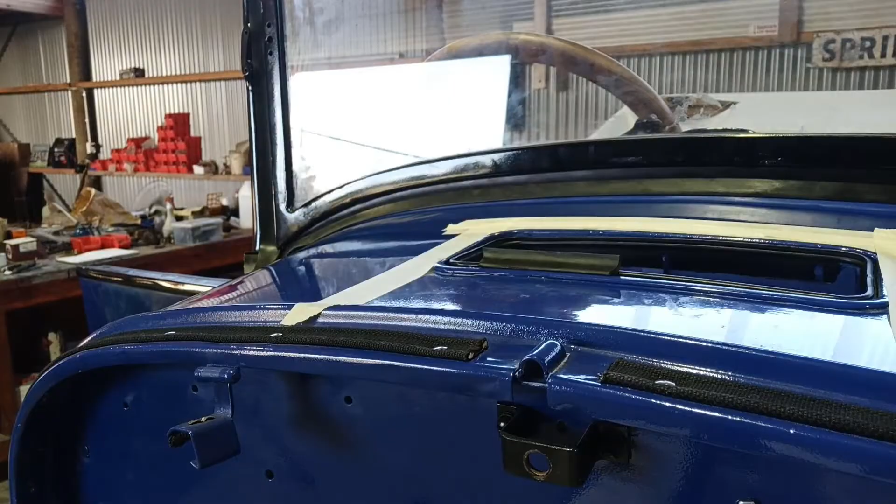Definitely work. We'll just have to trim that edge off. It pokes into the centre.

Tension on there, I think that'll be sitting there quite nicely. Yes, I think that'll work. Might even be able to leave that there, I don't know. Might just have to trim it in the corners maybe. But, yeah.

Right, that's good. That rubber will work, excellent. Right, we'll have another wee measure here, just do another wee work out and see exactly what we need on that other side.

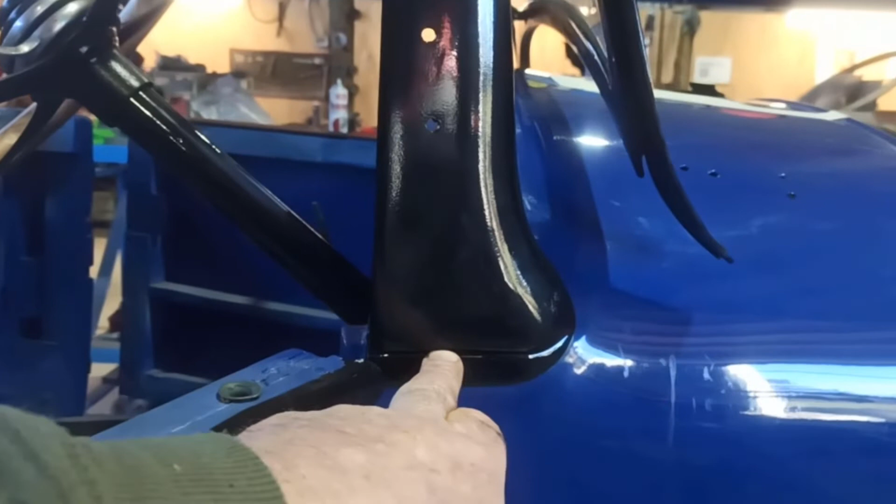Righty, I just had a quick measure from the bottom of the nut here down to this edge, and it's freaking, it's about 5 mil higher on the other side. So that's what's screwing us up there. So I was right, because they hadn't drilled this in here properly. If you hold a tape or a ruler from here to here, yeah, it's about 5 mils difference.

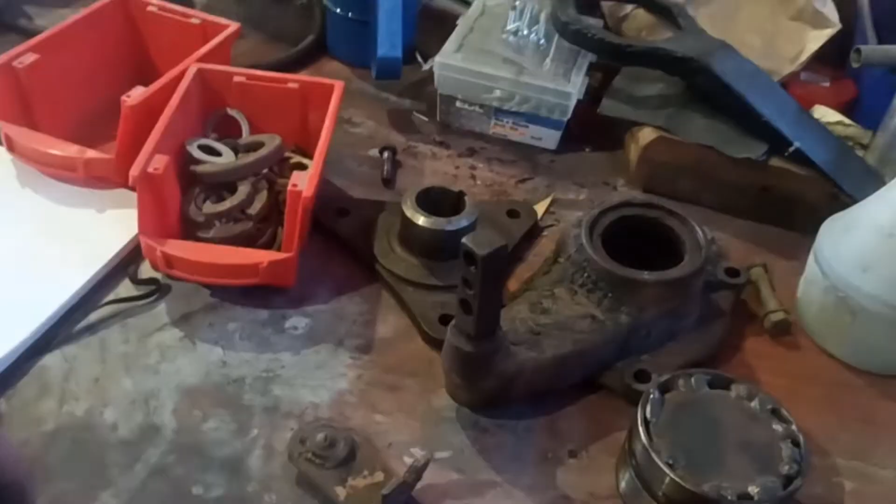I think it was 465 on one side and 470 on the other, millimeters. So yeah, that was the difference between here and here. So if we're talking inches, we're not quite a quarter of an inch, but close.

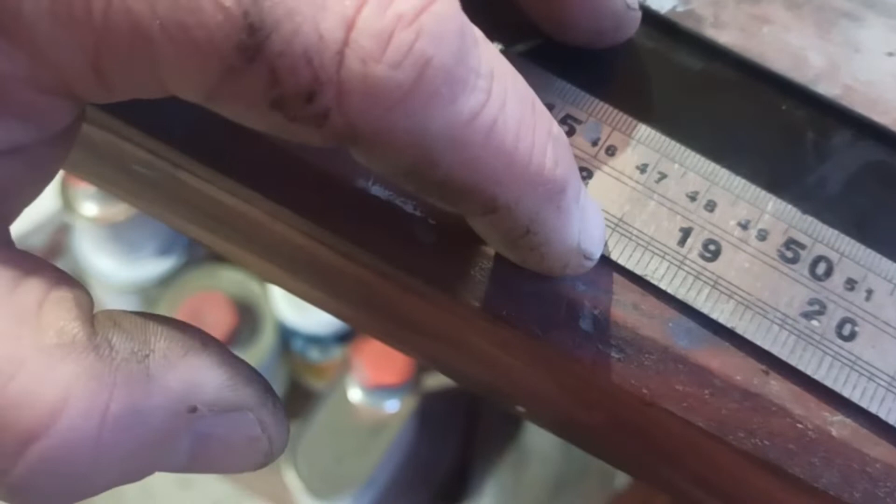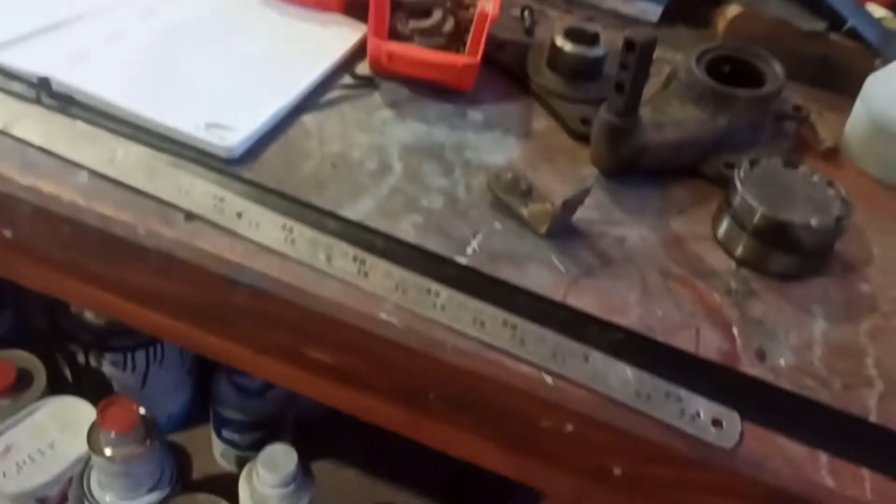What about 3/8 of an inch-ish? Maybe 3/8. Oh no, not 3/8. 47, oh I don't know. It's not quite a quarter of an inch, but it's whatever, you know what I mean. It's about.

Yeah, so we'll order some slightly deeper rubber. I just put a bit of tape on the bottom of it, and it sort of put an indent in it. So that's how much deeper it needs to be on the side. And just tape it back. So, I've measured this.

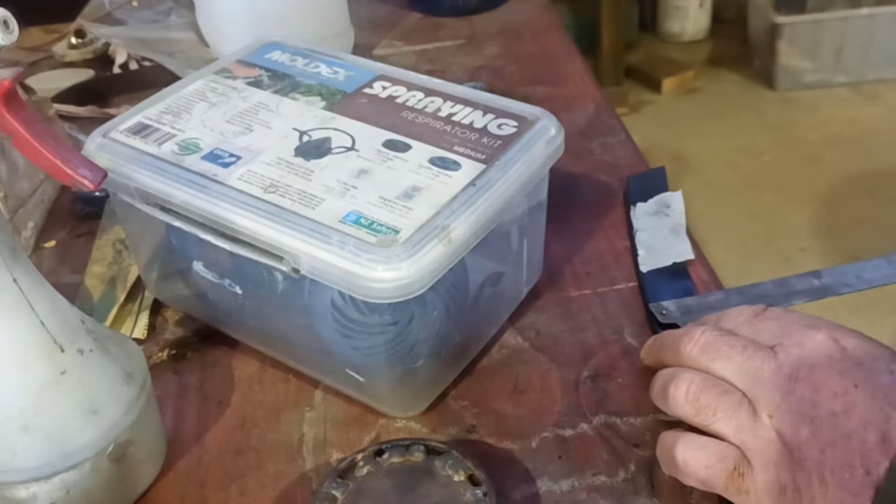Try and show you. So yeah, I actually thought when they measured this that it's, because this was meant to be 32 mil, but I actually thought it was from the bottom of the T to here, but it's the total thing. It's the total height, and it's barely 32 mils, which is, I don't know, an inch and a quarter or thereabouts. So yeah, it really needs to be.

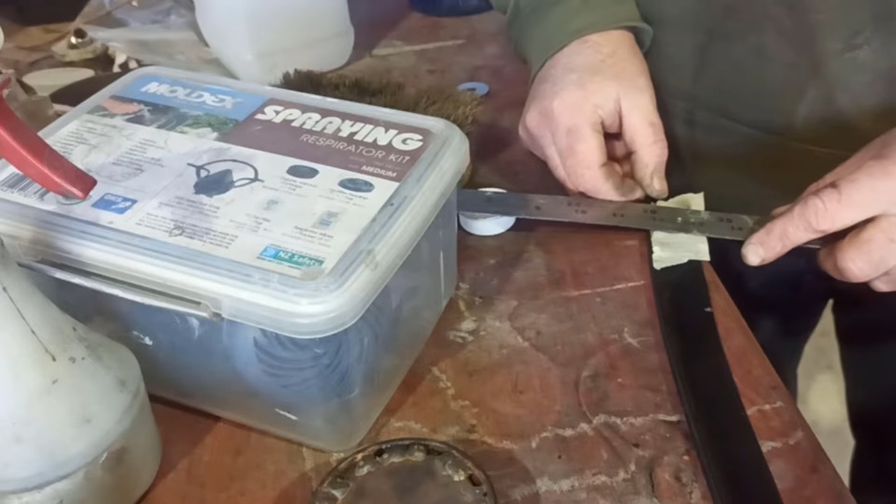Get a bit of the working part of the ruler, which is not so hard to read. Where are we going, to the 3M? So it needs to be about 38 millimeters, or yeah, 1.5 inches. So it's quite a difference.

And we'll just have to slowly trim it back, and we'll just leave it slightly longer on the side so it's not quite so obvious. But you know, we'll probably trim half that off to the other side or something like that, and just leave it a little bit long. And hopefully nobody will notice.

But yeah, that was what the issue is. Yeah, because they drilled those holes in a different place. Doesn't help, does it? But anyway, not much you can do about it. At the end of the day, I could actually probably sneak another piece of rubber underneath there and just pop it up a little bit, but I'd rather just leave it alone and get a longer rubber.

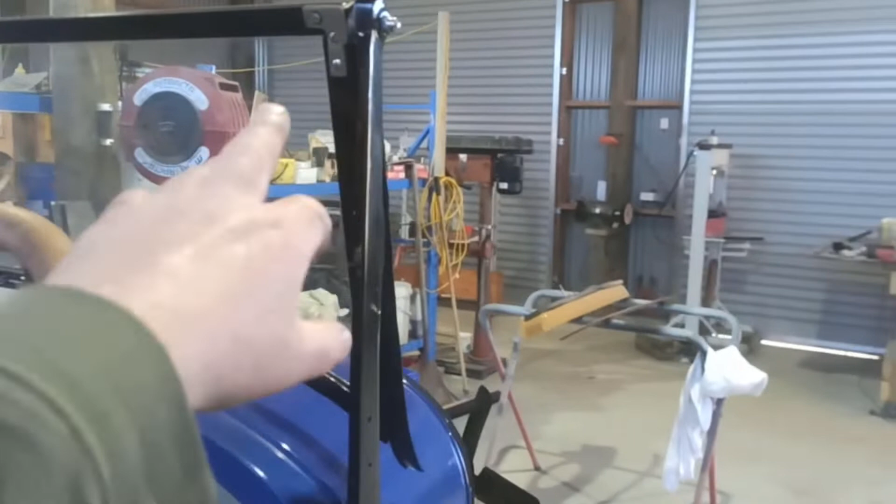Because I thought maybe you could balance it out a little bit, but there's not much I can do about it. If you had a few of them to pick from, you could probably muck around and pick two that were close and maybe alter it or something like that. But yeah, it's one of those things. And it's not to say that these here, you know, milled exactly the same either - there could be quite a bit of discrepancy with these pieces too, which wouldn't help the situation. So yeah, she's quite a bit higher on the other side.

Right, one gauge installed. So now we will go fit that back in the dash, with 3 nuts, because that's all I can find that are right through it at the moment. It's all good, we can soon get another one, pop it in there, put the hand up in there and put it on and tighten it up at some point, when I find another one that's the right thread.

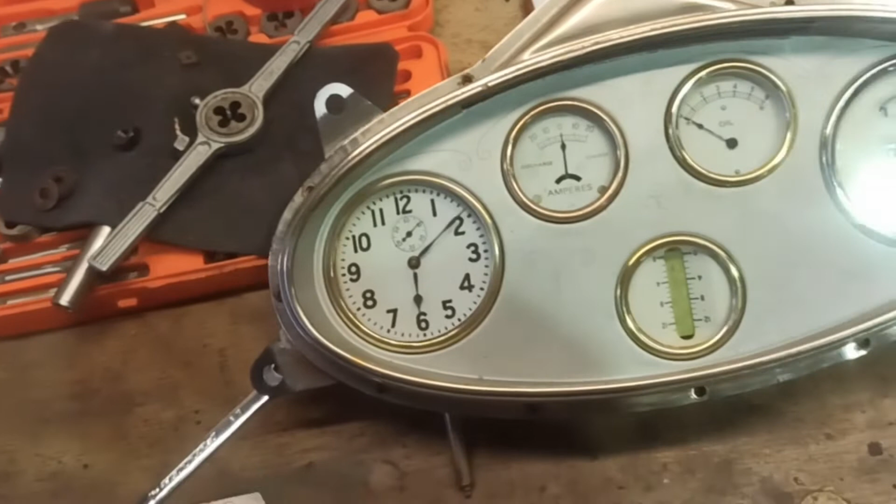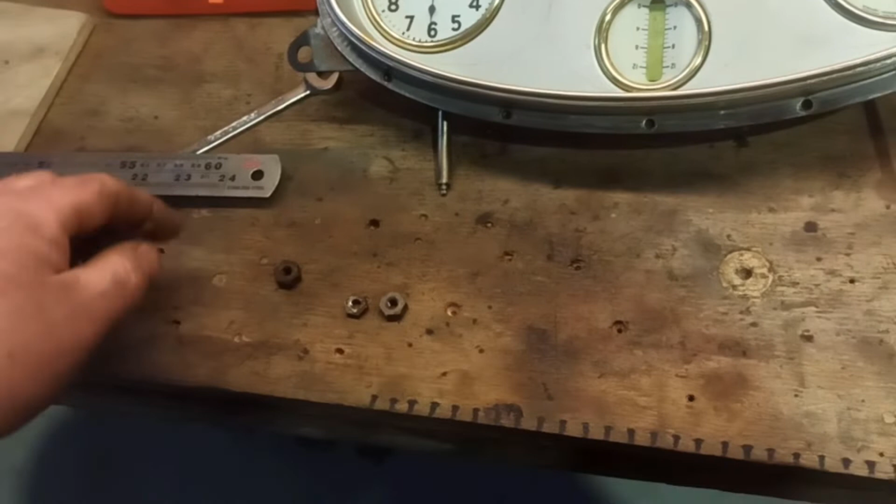There's these same thread as this. I'm just going to run them all up and down here a couple of times to make sure they are fine before I wind them into that dash panel. So yeah, it's good to have that done.

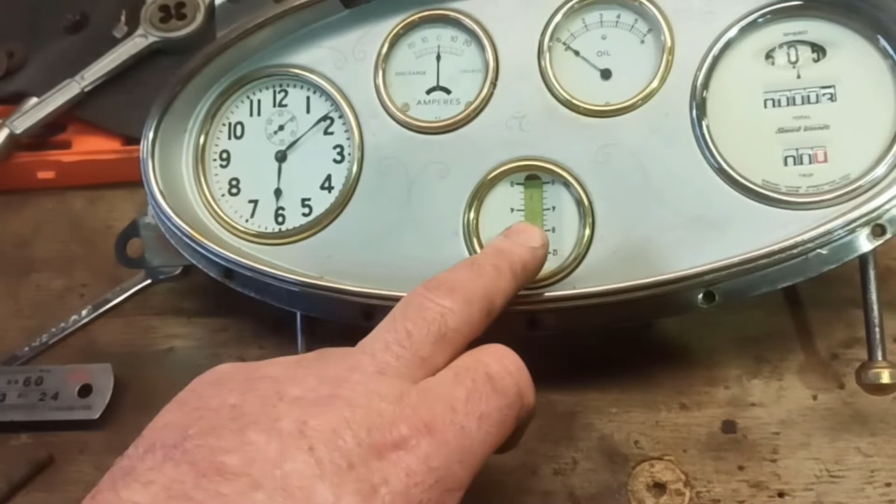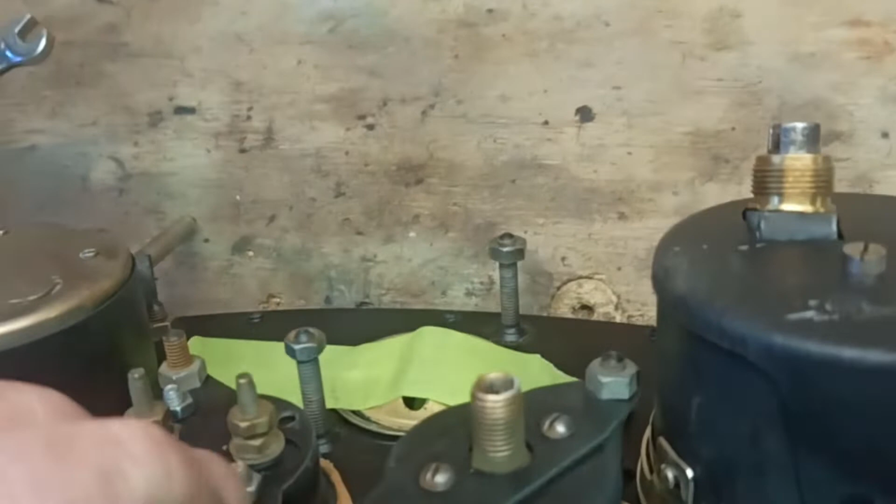Yeah, like I said, this is the only one that hasn't been sorted, but we need to, when we can, get those bits ordered. It's one of those things, it's only temporarily held in there at the moment with a bit of tape with that piece. So yeah, when we get the bits, we can soon pop it out of there and put it together and put it in.

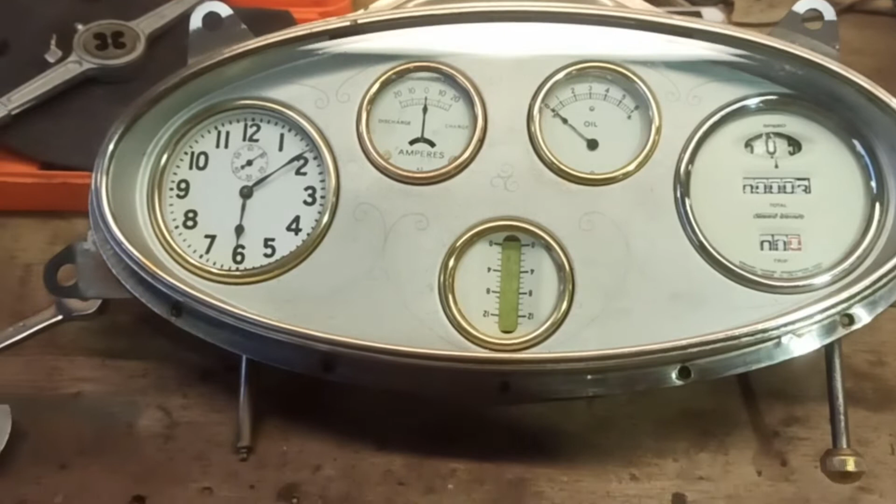Yeah, when we get to that far, it's not critical to start the vehicle. Nor is that either, but you know, at least we're, I don't know, 4/5 of the way there with these clock works. The only other thing we're going to do is organise a little brass button handle or something to go on the bottom of that at some point.

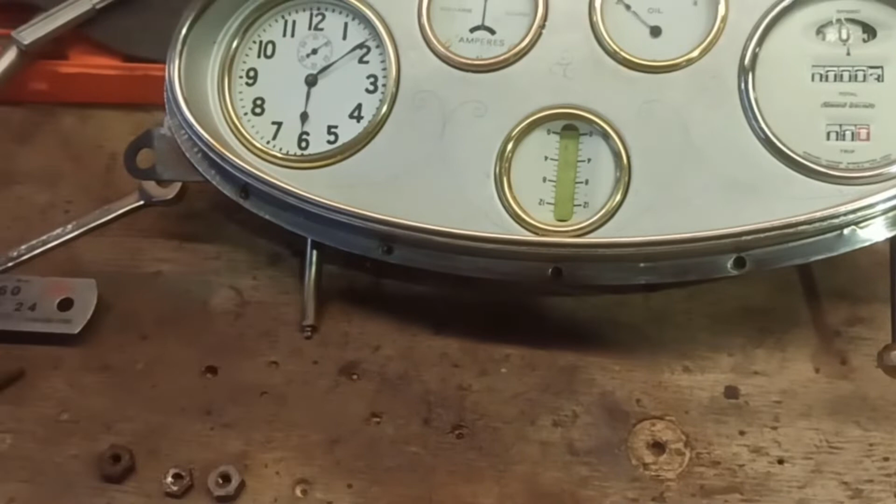Righty, so dash is back in. I'm going to have to try and get some better screws from here.

Just these old original ones, now that I've screwed this in a couple of times, it must have pulled the thread on the brass. It just won't grip very well now on a couple of these. So I really need to change them, which is a pain in the ass because of that funny, weird, fine American thread. Sorry guys, it's a real pain.

We're still waiting for ones for across the top, so hopefully they might be long enough to do in here, because of the same thread. But yeah, a freaking headache to get. I don't know why some of that stuff's just so strange, but it's not easy to get.

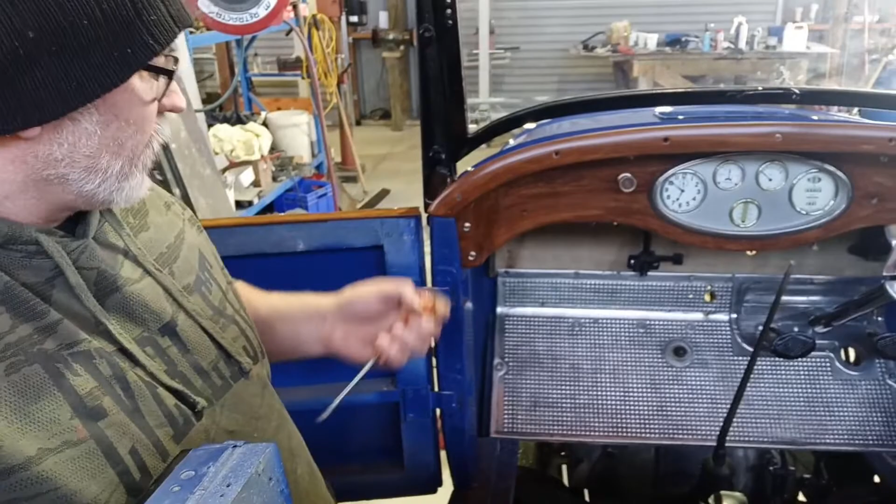So I'm just going to tighten up one screw on there. I've only got the 3 screws in here at the moment, but everything else is all done up. These won't tighten up though - they sort of wind all the way in, and then you go to tighten that last little bit. Must be the thread where you've pulled on them a few times, and it's a pain in the ass. Not much I can do about it though. It's just one of those things - when you're trying to use 100-year-old hardware, it just doesn't like being screwed in and out too many times.

But the dash looks good, on a bonus note. So the only other thing I do is tighten up the 2 bolts on the bottom of the column for the bracket. As you can see, there's a gap here at the moment - I've just wound them in there, I haven't tightened them up yet. But it's in there, so it's good to have that in.

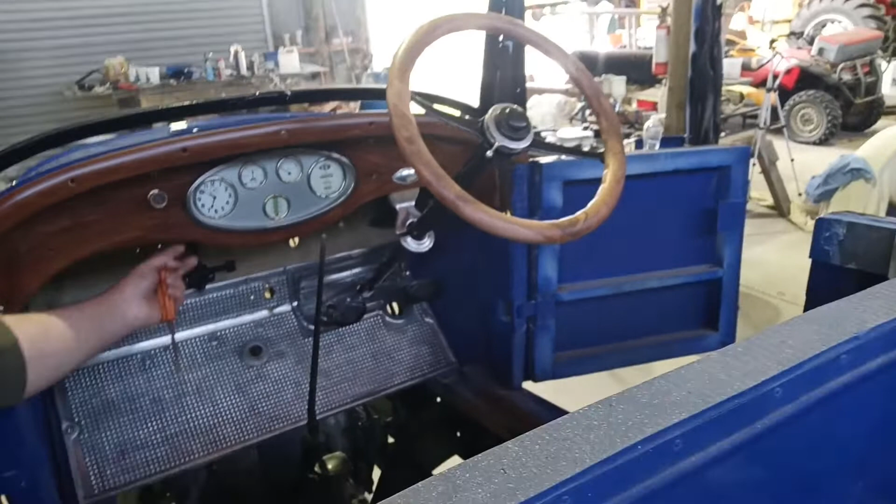The only nut I'm missing off the back of the main body is this one, which is really easy to get to. I did the top ones, and that one there is pretty easy to get to too, but this is fairly easy. I just go wind the nut on there and a lock washer and do it up at some point when I remember to get some more nuts of the right size.

This here will be easy to get to too, it's fairly simple. So while we sort that out, I'll get the bits for that, pull a bit of tape off, pull the ring and everything off, and put it together. It's just sitting there in the meantime.

Yeah, we're getting there, we are getting there. So we'll probably go to some lunch and then figure out what we're doing after lunch.

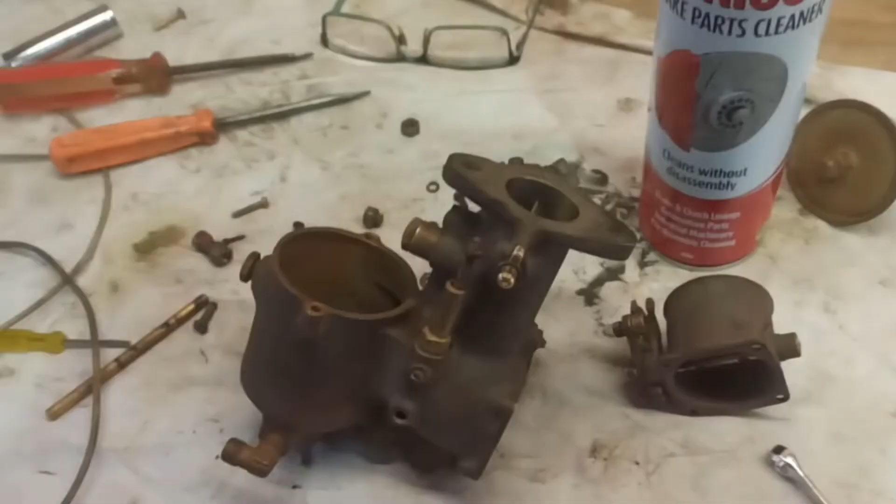Kind of getting somewhere. I think they got this butterfly working around the wrong way, if you know what I mean - I think it needs to operate that way instead of that way, so I need to turn that around. Unfortunately, that's the way they put it in the carburetor. So the butterfly needs to be turned around, and the shaft needs to be turned around and the butterfly put back in, so that it's the opposite way.

So I'm going to make this work, because this piece won't work with the accelerator pump - it's around the wrong direction. I've figured a lot of things out though.

I wish I had that TV here, because I'd like to watch the video on a big screen at full resolution, slow it down and go through it to pick away at where some of these screws and grubs and stuff are meant to be. I've worked out most of them. I've pulled some of it back out just because I want to double check. Most of it's pretty self-explanatory - a lot of it will only go one place, fortunately. But I'm just not 100% sure, because there's a couple of things which could go in different places.

To be honest, I don't think it makes a lot of difference. But with some things, like that can only go on there - these here will only fit on the bottom. This one here, I think, is it that one? One of these could go up here, but the thread's not the right size, if you know what I mean. Or might have been - I thought maybe that could've went in there, but it's too big. The thread's too big, but it winds in there. I don't know, there's a few things I'm just not 100% sure about.

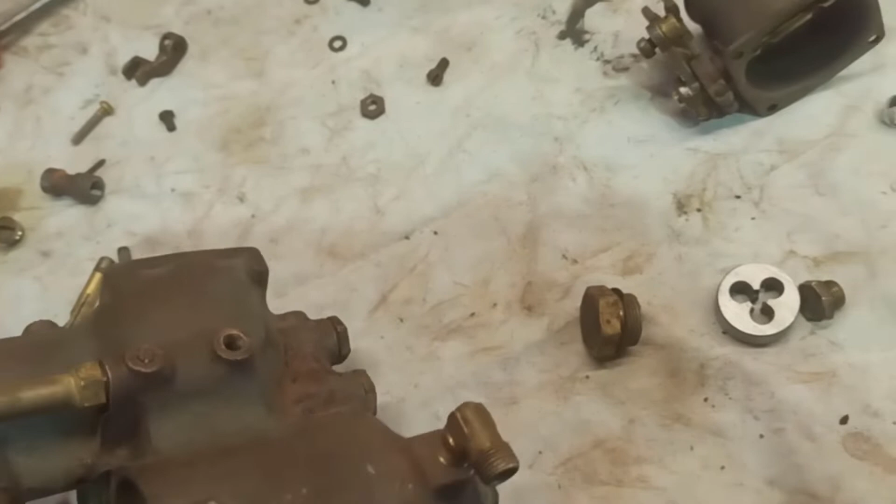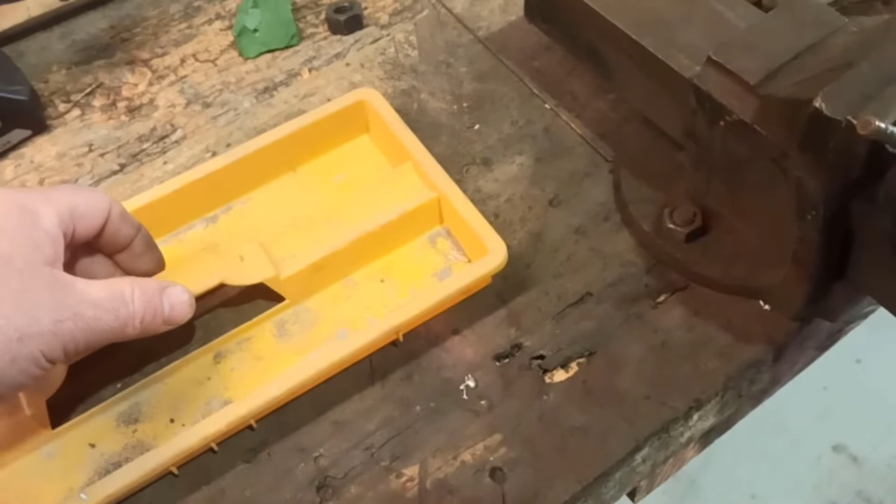But I got mostly back together. I think somewhere along the line, with having the stuff in that tray in an open size, I reckon there's been a couple of little blank off grubs falling away somewhere. So I might have to go dig those other two carburetors out, those other follow-on ones, and just see if there's any little blank off grubs anywhere.

There's a couple of little spots in there, because I've got a photo of all the bits laid out, and for some reason there's a couple of little blank off grubs missing. Like this little thing here. There's a couple missing for some reason, and I just don't know.

I had everything in there when I cleaned it all up, but like everything else, it's been moved a few times, trying to make space for other shit, and I just wonder if it rattled, because it's got this bloody hole in it. I just wonder if something's jumped out of there, rattled out over time. Yeah, they've got misplaced somewhere, like they probably are still around, but it's a matter of hunting them down.

But there are those other couple of carburetors, so I can pull them apart, and I might pinch a couple of little blank off grubs for some of these little holes, just to make sure that they are blocked off, because you can see with the threads, you know, clean in them. There's definitely been something in them.

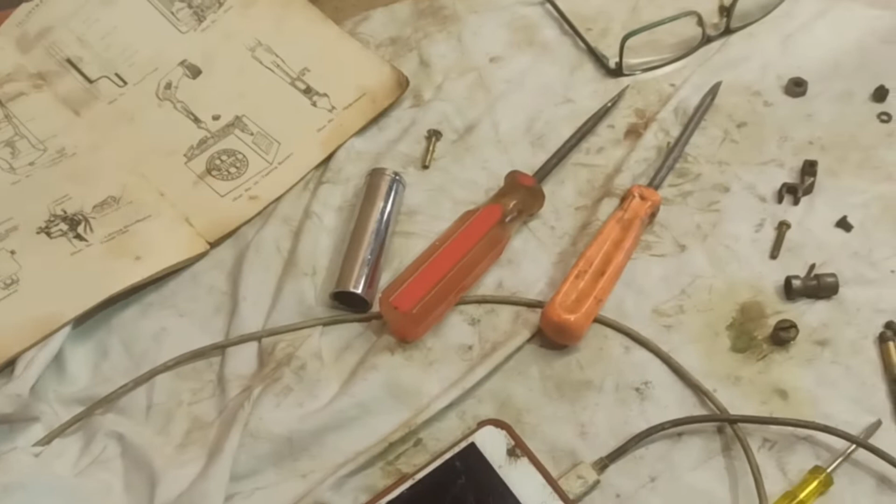I'm pretty sure that's kind of why I freaking want it. I'm sorry, kicking myself that I deleted that footage by mistake, when I was cleaning up some older footage trying to make some space. I never meant to delete it, but I did.

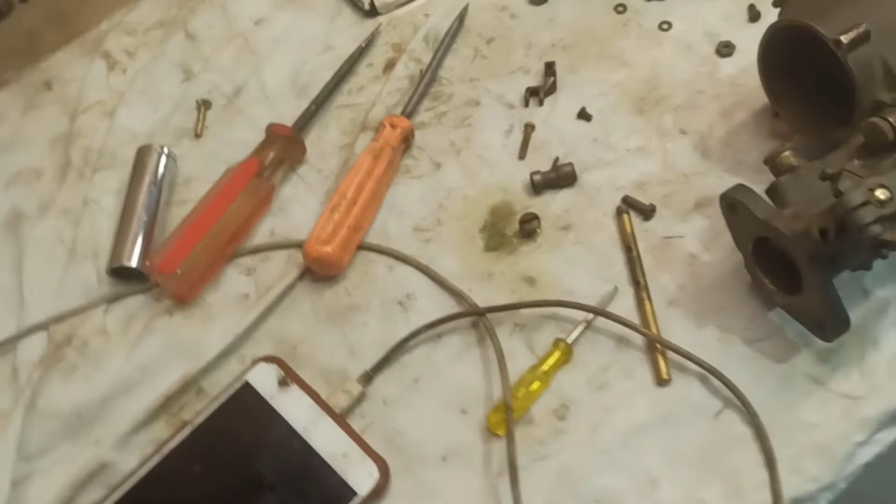It just grinds my gears. Those little grubs will be available if I can't find them, or I should better make something or find something to make it work, but it's a pain in the ass.

But I think if I watch that footage enough, even though it's a bit fast, even when I've slowed it down, if I can throw it in the computer and slide it down further if I need to, and just try to pick up maybe a few things, just catch where a couple of these bits and pieces were, just to get them back in the right place, just in case for some reason they need to be in the exact right place, if you know what I mean.

But a lot of these things you can look at, you know, you can kind of see that it's had something up against there, but I don't know if it was that, if you know what I mean. But it doesn't really do anything. I mean, a lot of these things are just blank offs. They kind of don't do anything. It's kind of weird, you know what I mean? It's probably just so you can get in there and clean shit out.

But yeah, so we'll get it back together. But it would be nice to have that footage, because I actually would have hunted it down, if I had it, I would have loaded it onto YouTube so I could watch it slow on the phone or on another screen or something like that. I had it here, that was my plan, but I pulled this apart. But yeah, I kind of messed that up.

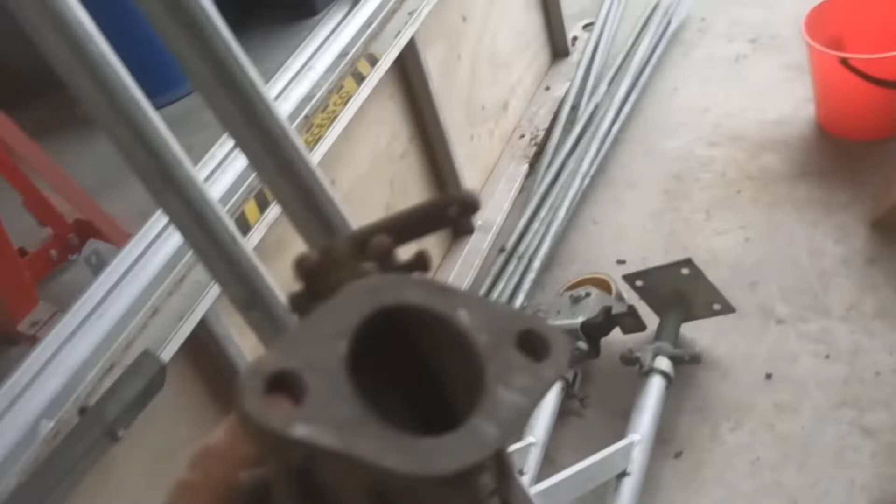Make sure I know what Studebaker that's off, doesn't it? Probably off an older one. Don't know, or it could be off a big 6 or something, you wouldn't know. But yeah, we might pinch some bits out of it, just to replace what's gone missing.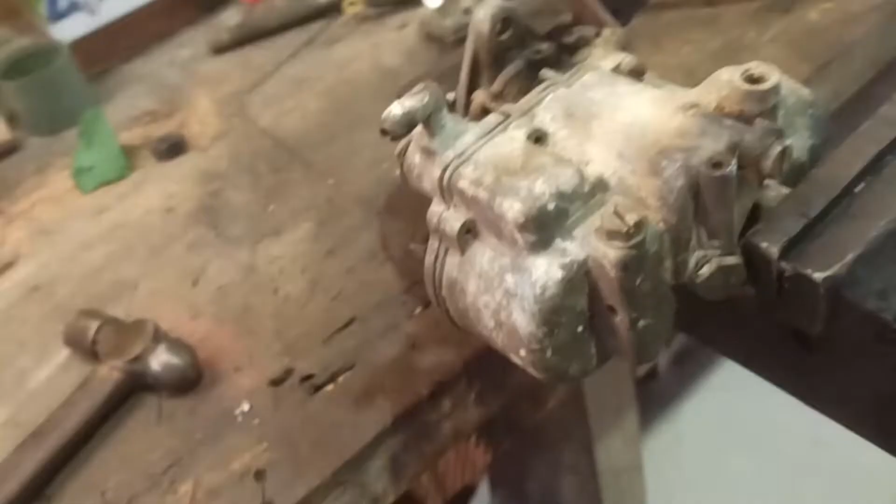See if I can get some bits out of here and we'll keep working at it. Right, so I managed to scavenge the old bits and pieces out of there. If we need more, there's plenty more in that one, so we'll see if some of these will fit in here.

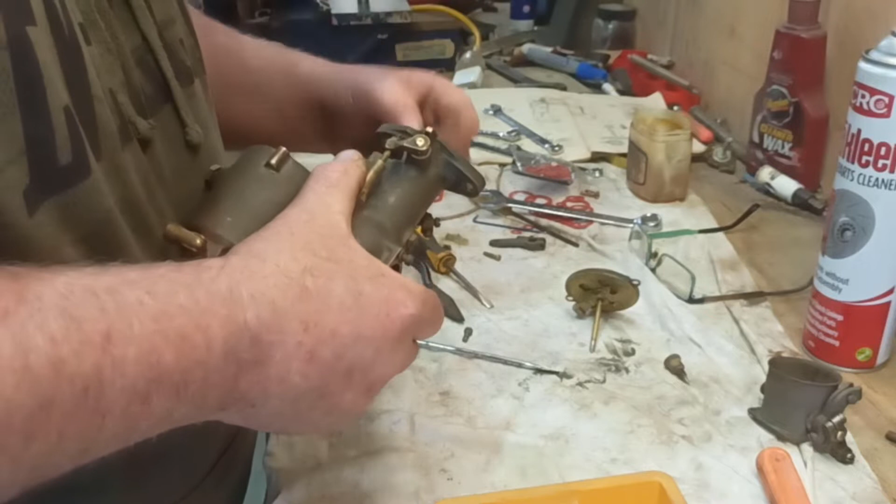Me joking. Right, let's see.

So we'll see those spares, those little spare plugs. I get a sneaking suspicion this is not off that. I don't know though, that's why I watch my videos a bit earlier. Right.

So hoping that one there might be a bit like that one there, so we'll take that out. Yeah, it's a pretty close resemblance. Right, and those ones there. Anything like right here? We're bound to have something somewhere.

Somewhere over the rainbow, pigs do fly. No? Yeah, I wouldn't give up my day job either.

Yeah, we might have tucked down one of those little squares, one of those ones. It might have some of my little collection of bits. Yeah.

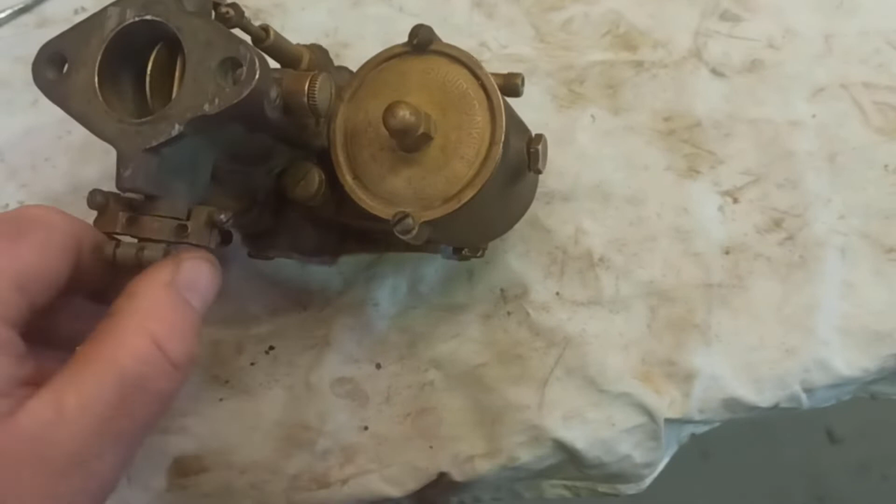Well, I think I got it back together. Like I said, I'll have to double check that video and slow it down and have a really good look. I think I've got it right now, just by process of elimination and using some common sense, I guess.

So yeah, this here must be when it's wide open. When it's closed, when the throttle's closed off, it must shut the fuel. I don't know, I would have thought that would have pulled it up when you were going to accelerate, but I'm not sure how the carburetor works either, you know what I mean. Because it definitely doesn't work with the blade running the other way.

You can't get this in the right position for it to do anything at all. You know what I mean, like the hole's in the wrong position, and according to the original shaft, wherever that's gone, here somewhere. The hell have I done with that?

Crikey dick, put a little bit. Oh, here. So according to the original shaft, so that's the screw side. So everything's in the right place.

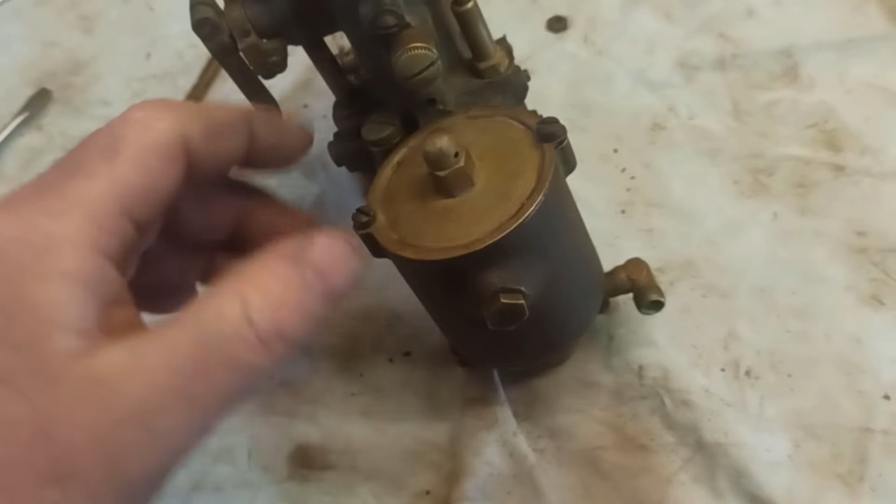And this is your adjustment for your mixture, obviously. And yeah, obviously if you adjust this up and down, it obviously alters this part of it too. So yeah, it's not really a lot to muck around with, you know what I mean.

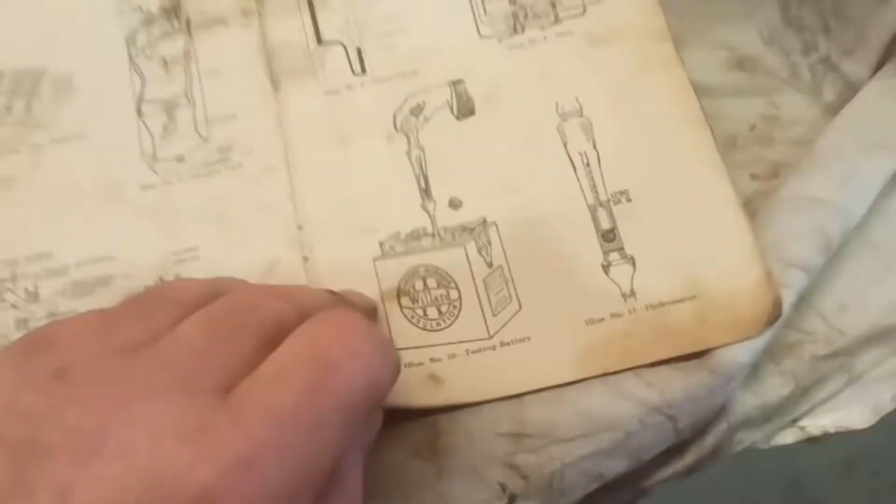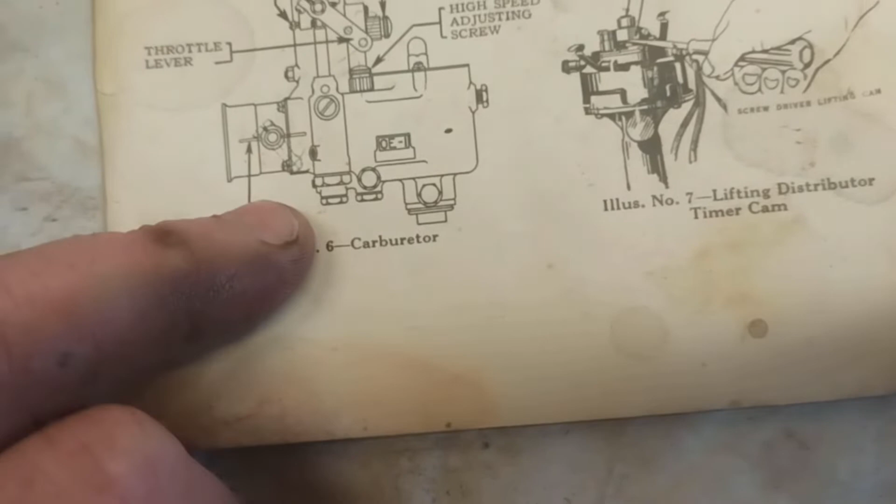Actually, what does it say on here? Let's have a quick wee nosy. So your idle adjustment and your high speed adjusting screw, that's what those are. Choke, throttle lever. So yeah, that's pointing in the right direction.

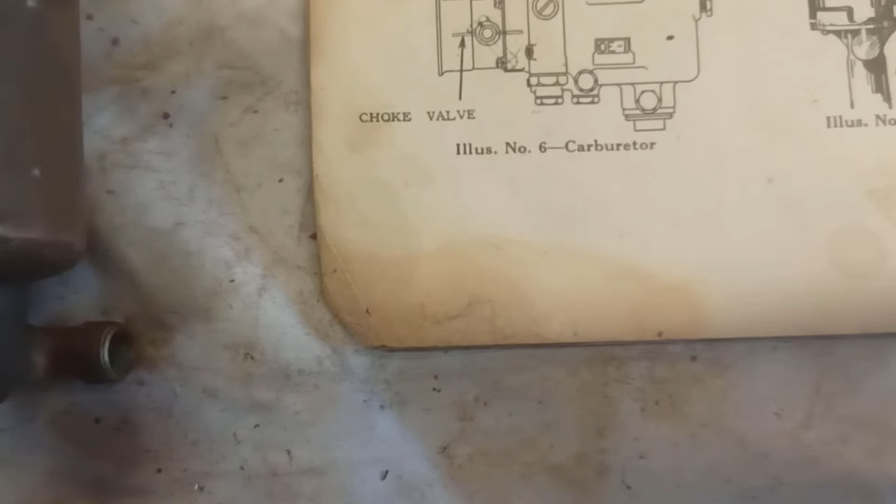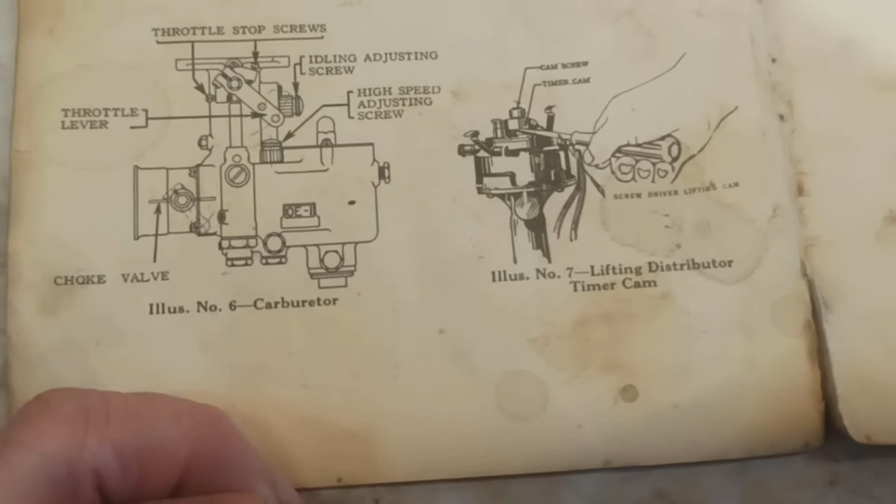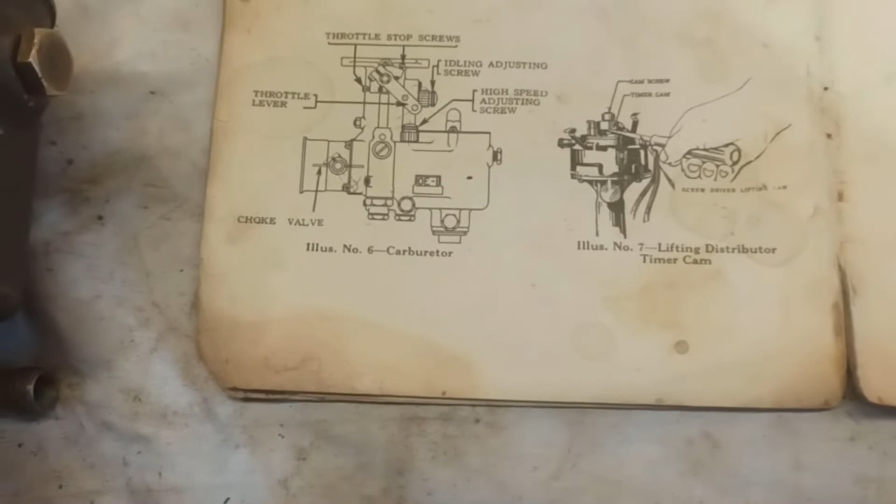I've got that in the right place. You've got your throttle stops, which are these two here. So yeah, again, like you can see that little nut piece there, that's that there. So I think we're all pretty much in the right ballpark, if you know what I mean. I think. Yeah, so like that's that piece. So yeah, we're pretty much in the right, all in the right thing.

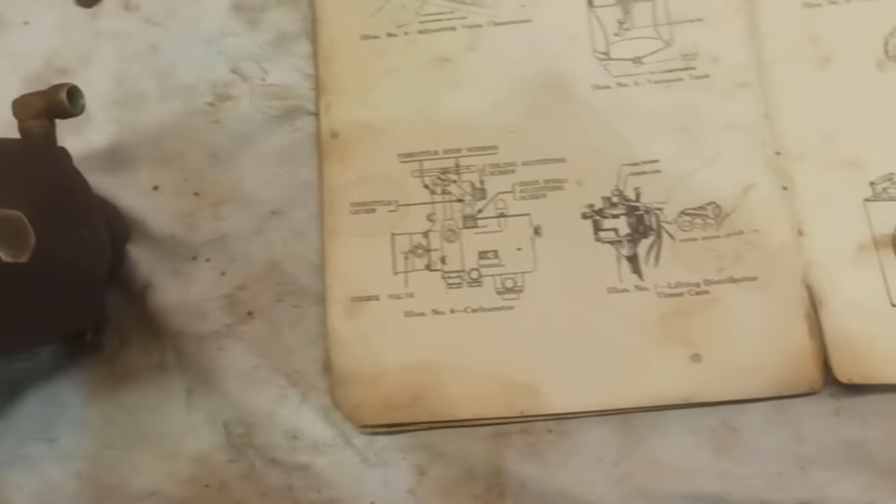I don't think I've messed anything up, if you want to put it that way, if you know what I mean, going by that. And there's your fuel, which will have to be, I'll probably have to turn that round, or tighten it up and turn it round. But I don't know, that might be alright.

Yeah, this must go, I would think this goes on there like that. So we'll probably have to turn that round. Again, I'll have to double check on photos. It could go both ways. But when I have a look on the photos of other cars, I'll soon figure out which way around it goes. Actually, let's have a quick wee look here.

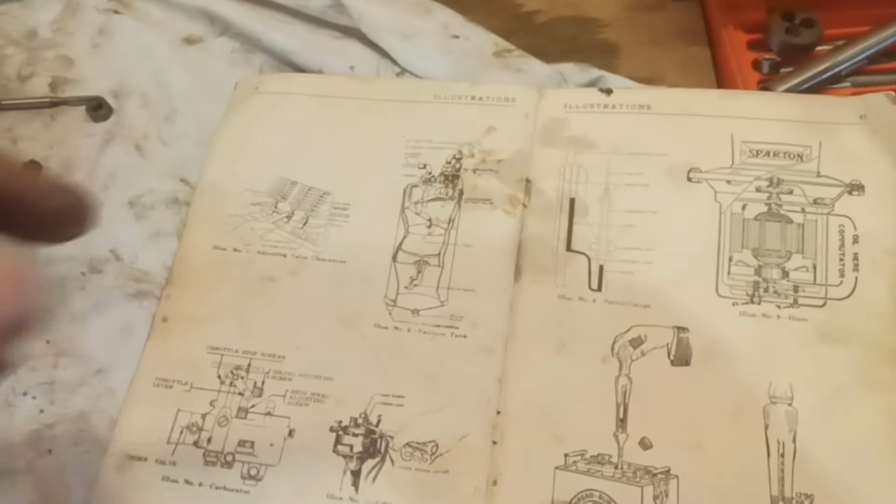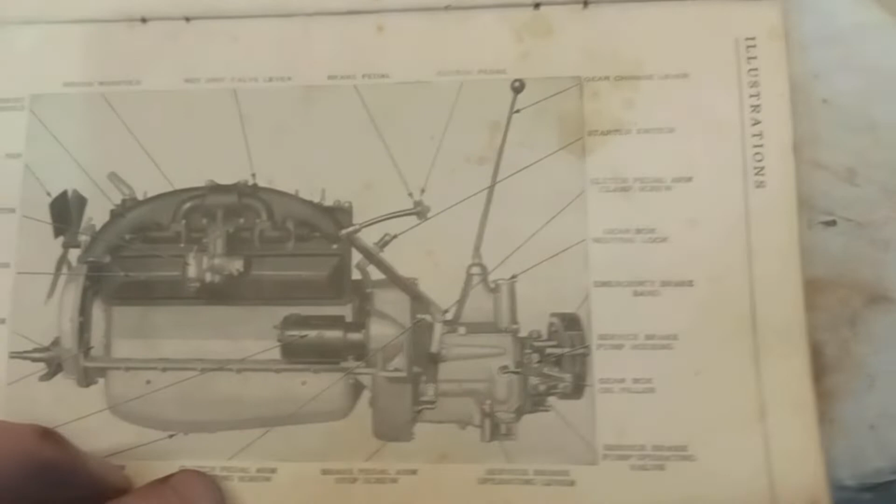Got photos of the engine here and there, haven't I? So, let's have a look. So yeah, the bowl goes to the front, so it's that way. That's cool.

Yeah, so I'm right. It was alright. So yeah, that'll fit on there like that. I'll just have to screw that fuel line around the other way. I haven't tightened that up yet, if you know what I mean. It's in there, but it's not tight. But awesome.

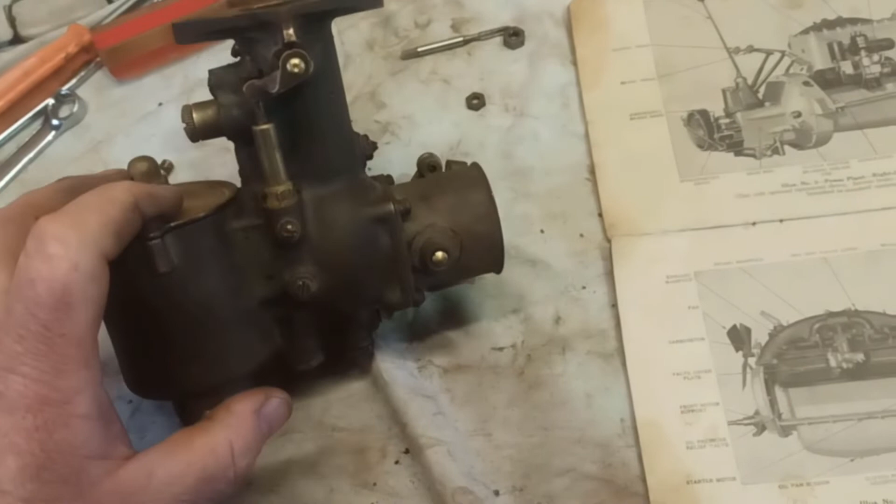So hopefully we don't have any issues. So yeah, I wasn't too worried. I think there's possibly a little bit of movement in that choke, the choke side of it's a little bit of movement there. It's not going to make a huge deal of difference. It's a little bit of movement in that shaft. I'm more worried about this one.

So we had that redone, so it was nice and tight and wouldn't bleed. If it's sucking a little bit of air past here, it's not going to make much difference by the time it gets there. Like that's your throttle control, so it's only letting a little bit of air past if you happen to have the choke on or something like that, you know what I mean. So it's not going to make a massive difference.

Now, worst comes to worst, we can soon make a new bush for that if we had to, or a shaft if it did happen to be a problem. But it's only a choke, so it's no major dramas. Everything else, all the needle and seats and everything all seem to be in reasonable shape. How good, I don't really know, but you know what I mean. Like they all seem to mate into each other, and none of them seem to be horrendously worn.

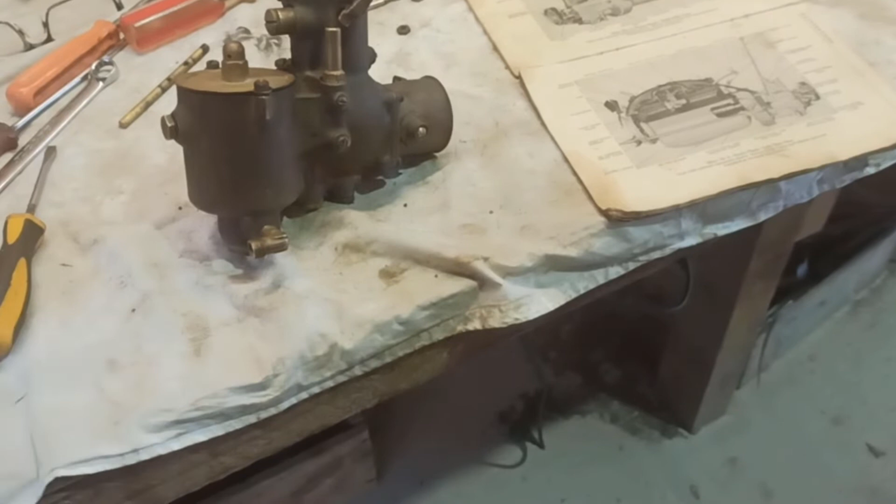So it's just a matter of putting it in together and putting it on, getting some fuel in it, doing a bit of adjustment and make sure it doesn't flood itself and anything stupid like that. If we do have any issues, maybe we can get a few bits and pieces for the needle and seat, but it looks pretty good in there. It doesn't look horrendously worn out or anything like that.

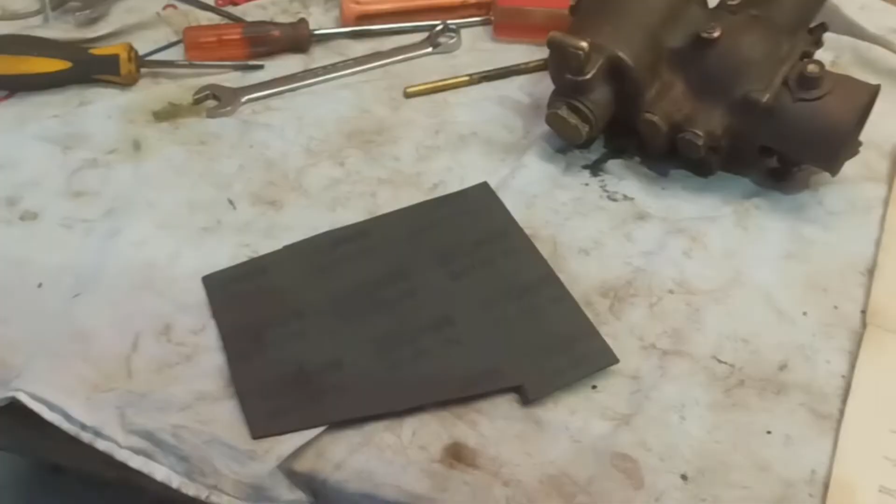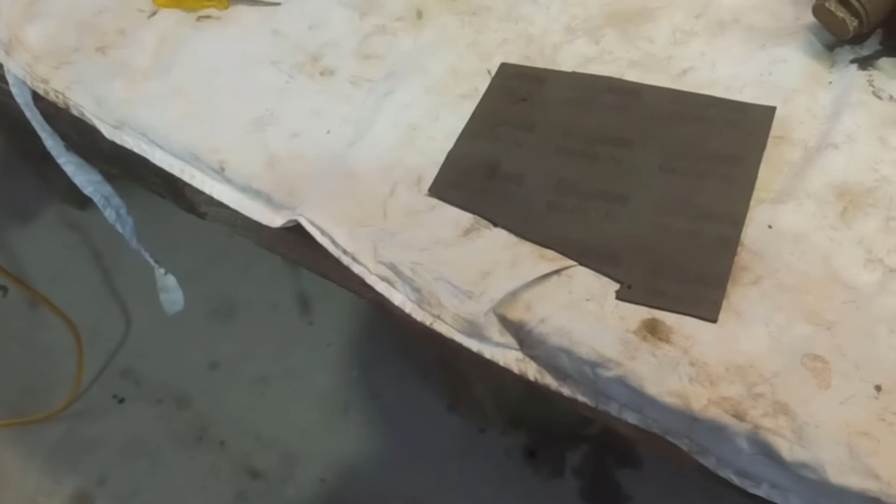I'm not going to make it now, but I might use that for the carburetor gasket because it's nice and thick. So if there is a little bit of unevenness in here and on the intake manifold, hopefully with that being quite a heavy, thick gasket, that might just solve any issues, if you know what I mean, if there does happen to be a little bit of unevenness.

But yeah, we'll find out hopefully in the next few days, maybe. See how we get on.

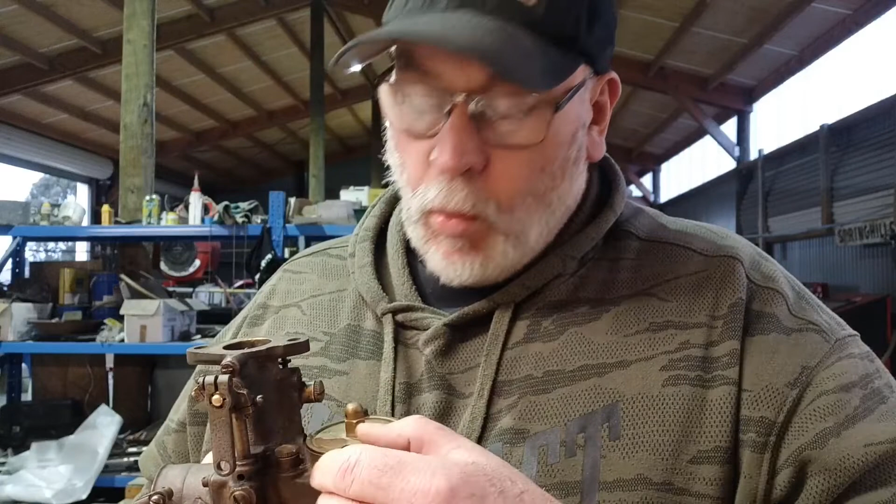The only thing is, I would say, this is a little bit of a tip from the old man from years ago. If you've got any of these sorts of things, with mixture screws and whatever, the old man always said, for a base, wind her in all the way in, and then wind it out 2 to 2.25 turns.

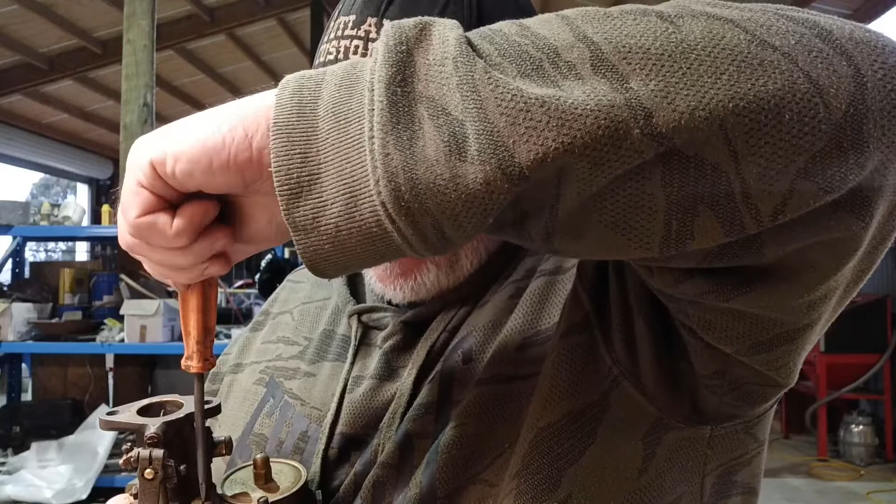So, 1, 2, we'll go a quarter. Yeah, they're about thereabouts. We'll do the same with this one. 1, 2, that might be too much. And this, yeah, it's going to be too much. It doesn't go very far. It does, but it doesn't. We'll go 1 turn on this, just to see. We'll have to adjust that, but yeah.

A lot of times, yeah, Dad said like on mixtures and carburetors and bits and pieces, 2 sort of turns for a base if you don't really know, and go from there. I've used it on a lot of things and it's been pretty close. You might have to dial it backwards and forwards a little bit to get it close, to get it pretty sweet. As long as carburetors, even like Holleys and bits and pieces, but a lot of stock carburetors on vehicles, it's a good rule of thumb. Follow it if you're not sure what it's set at - you just wind all the adjustments all the way in, and then back them out about 2, 2.25 turns, and go from there. It's normally a fairly good happy medium, if you know what I mean. And you normally can get it running reasonably well from that, and then tune it closer.

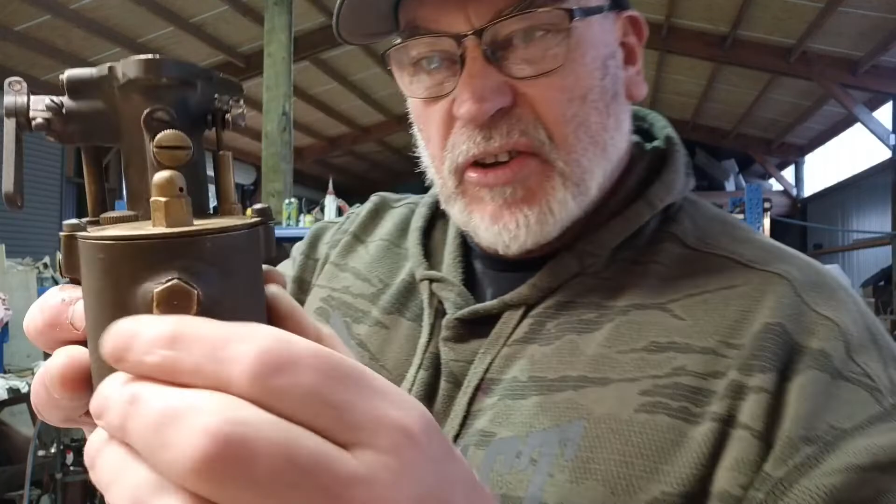But anyway, got a gasket made. We'll see if we can tackle up those screws a little bit, just because this doesn't quite pull hard down. I'm just a little bit dubious of that, so we may have to make a little gasket for in there.

But yeah, we should better get that on this morning, and at least then work out some index bits. And I better get that fuel canister back on there, and we'll go from there, I think, now that I've got that carburetor back there.

And I'll try and work out one over there next, whether after that or whether I go to the rear end and get all that sort of half on, or something else. I'm just trying to decide which direction I'm going to go in, but I'll get this on anyway.

And the main part of the fuel, or the tank back on, vacuum tank, at least then at some point we can work out hoses and fittings and whatever else, you know what I mean? All these sorts of bits and pieces.

Pretty sure this one's shot, but it's what we need. Is that here that's shot? Oh no, it's this end that's shot. But yeah, get some copper tubing on there. So would have been copper tube fuel on, way back. So yeah, I'll stop waffling now.

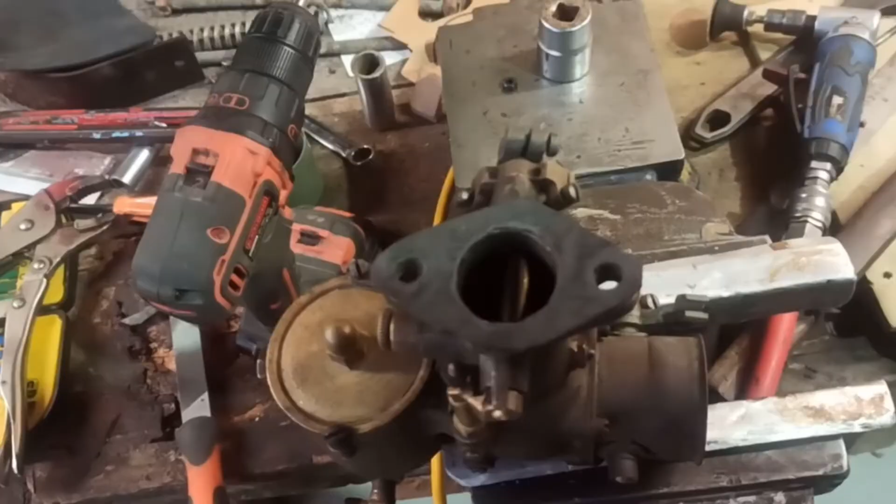I think that'll do the job. It's not the prettiest gasket, but it's quite thick and I didn't want to wail on this and damage the surface. You know, being brass, it didn't feel easy. It's not hard like cast or anything, a lot harder anyway. So yeah, I'd rather not whale on it. That's why I used a chisel and a drill and whatever - just bang on it enough to mark where we needed to be. So yeah, we'll find some nuts and we'll get her on.

Maybe make a throttle link to the side.

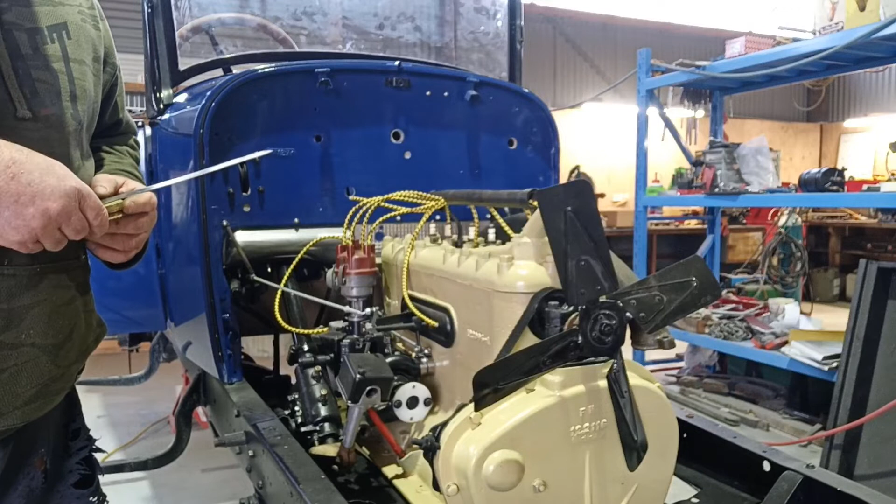So I think what I might try and do somehow is see if I can find a hole saw that is 2 inches roughly on the inside, close to it. So I've got this one here, but it's like 2 and a quarter, too big. This one here is too small, but we do have the other hole saws, just not here. I might go see if one of them is about 2 inches.

See if I can just whip up a wooden ball in the meantime, throw in a bit of hardwood or something. Not quite sure how I'm going to do it, but I'm just thinking maybe I'll put a piece of wood in the lathe, and put like one of these on the drill, a cordless drill, and go around like that, and just try and make a halfway round wooden ball that will fit in there.

Because I haven't had much luck trying to find a steel ball, not without spending really silly money for one. If we have to, we'll have to, but like $75 for one steel ball is a bit ridiculous. If we have to, but

let's see if we might make something up temporary first, just to - and I might try and make a throttle linkage to the other side. Work that out.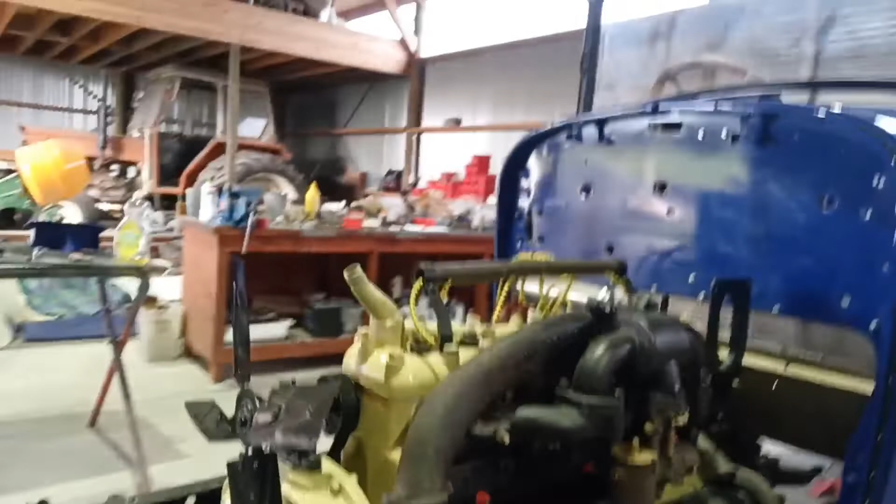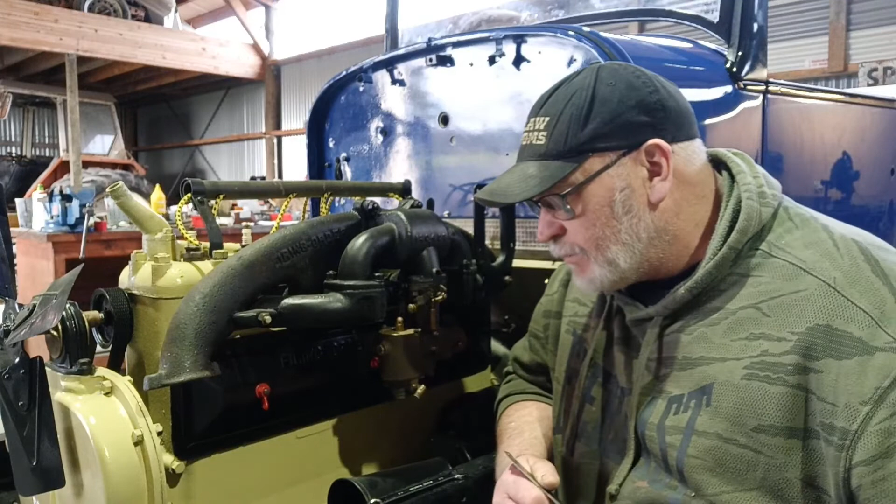And I think, I don't know, I might try and make it adjustable, I don't know. But I can maybe find a, you know, something you can wind in and out.

The length adjustment right - so if that's right off there now, that there should be right off the carburetor. The biggest problem is it's because the ball's not in the thing exactly enough, you know what I mean?

We need something about 14.5 inches long, or about 370 mils thereabouts, somewhere around about that sort of length. And the linkage from here to here.

It'd be nice to just have a little adjustment in it. I don't know whether I can do that or not. That could be adjusted.

Probably what I can do is make it straight, just a straight rod. And I don't know whether I can make a couple of those little ball linkages, so you can just wind them in and out if you needed to, just independently of each end.